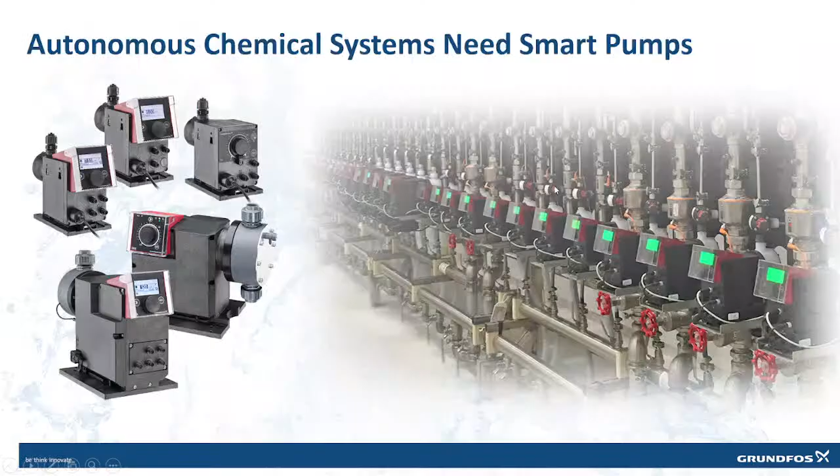So in today's market, it's all about trying to be digital and be autonomous and be able to do things remotely and not have to have the human aspect to it. So we're going to put that spin on this for the presentation, and how our pumps are accurate and how they can help you save time and money.

With chemical pumps, dosing pumps, safety is always the utmost concern. So these pumps are designed to handle tough chemicals - your sodium hypochlorite, your caustics, peracetic acid, whatever you guys are using out there in the market. By the way, what are some of the chemicals that you guys use for dosing pumps?

Sodium bisulfite? Yeah, okay. Well, with diaphragm pumps, sodium hypochlorite, they have problems with gassing. Yeah, right.

Okay, we'll talk about some of that and how we can hopefully address that for you.

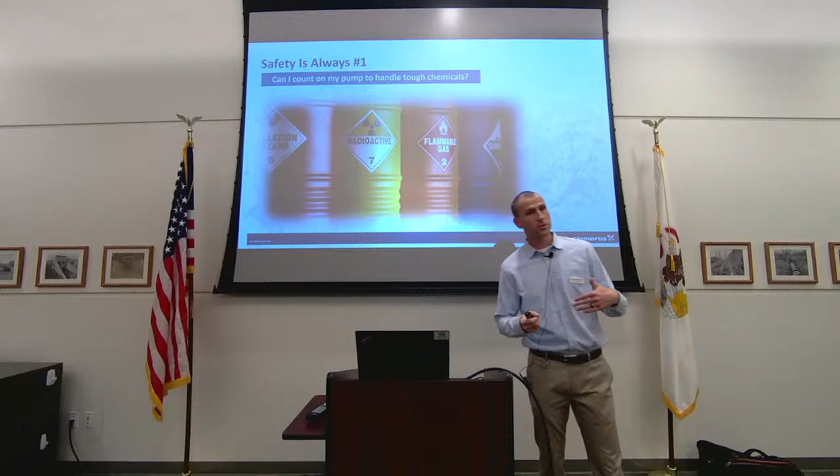So safety is obviously very concerning. Basically, when you're treating water, you're literally introducing a poison into the water, so you have to have pumps that are accurate, dose correctly, and dose on time. You don't want to overdose, because one, you're wasting money on chemical, and two, you could poison people. And the opposite is true too—you don't want to underdose, because then you can have disease and things generated in the water line. That's something that's kind of stuck with me: you're literally introducing a poison into the water line, so it's something you have to be really cognizant of when talking about chem feed pumps.

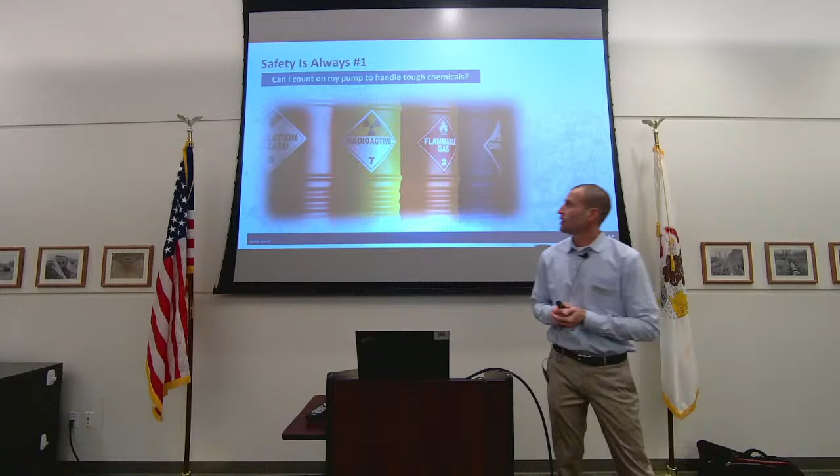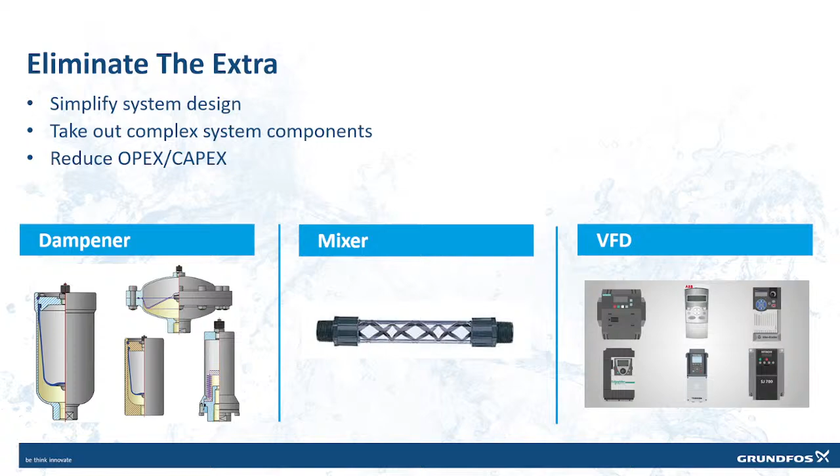So today we'll talk about some of the benefits of the Grundfos dosing lineup—how we have a simple system, how we can eliminate pulsation dampeners, how we can eliminate a VFD on your dosing pumps, and how we can eliminate an inline static mixer and a pulsation dampener.

Is everybody familiar with what an inline static mixer is? I can talk about that a bit more later as we discuss pulsations. Basically, you have a water line connected to this, and it helps distribute and mix chemical as you're dosing into the water line.

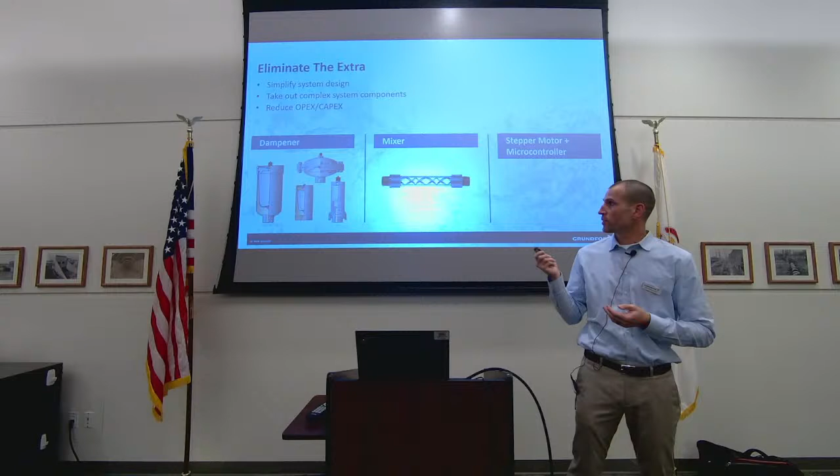And a pulsation dampener helps to dampen pulses from a chem feed pump. As it's dosing out, you can sometimes get pulses, so a pulsation dampener helps mitigate that. With our pumps we can eliminate those, which saves cost. So we'll talk about how we can make pump selection simple and how we can make integration and maintenance easy for you.

So what are the basics of a chem feed pump? You have to be able to control the pump. There are a lot of different types—you can vary the stroke length or vary the frequency of the stroke, which is the rate. So you need some method of controlling a metering pump.

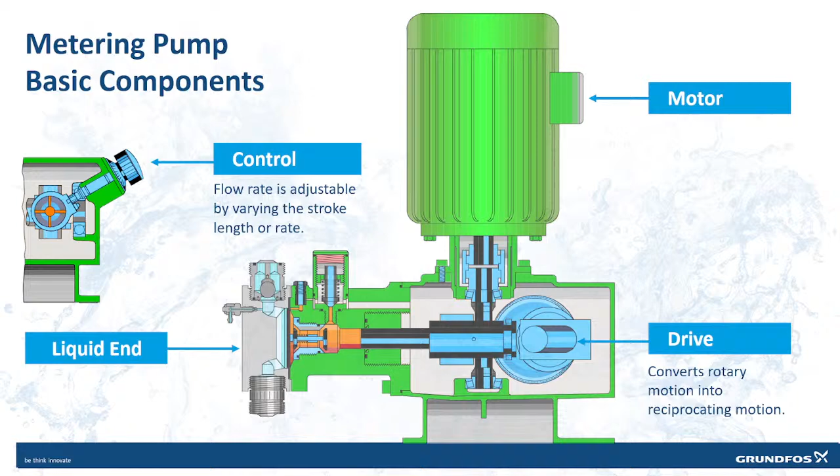Any questions? I'm going to spend a lot of time talking about diaphragm pumps. The other alternative out there in the market is a peristaltic pump. What kind of pumps are you guys using out there—are they a hose pump, a peristaltic pump, a tube pump, or diaphragm style?

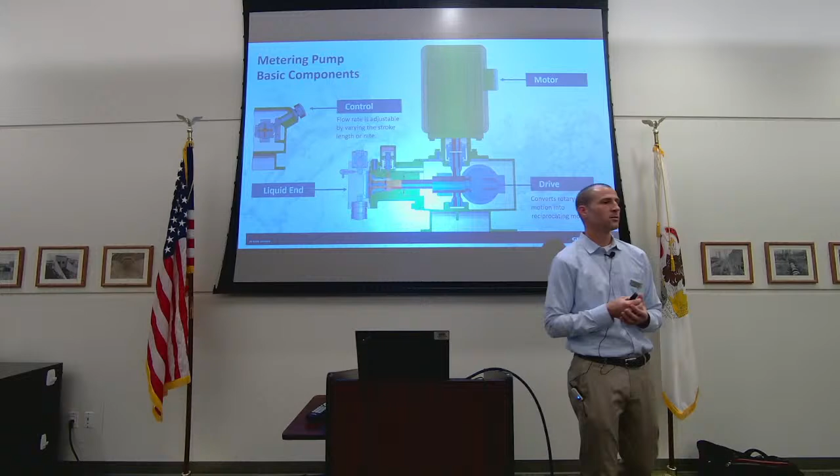Peristaltic? Yeah, okay. What, both? Just—is it cost, is it availability? The wastewater side feeds ferric chloride, we just have some LMI diaphragm pumps. And then the water treatment side uses some peristaltic. Okay, okay.

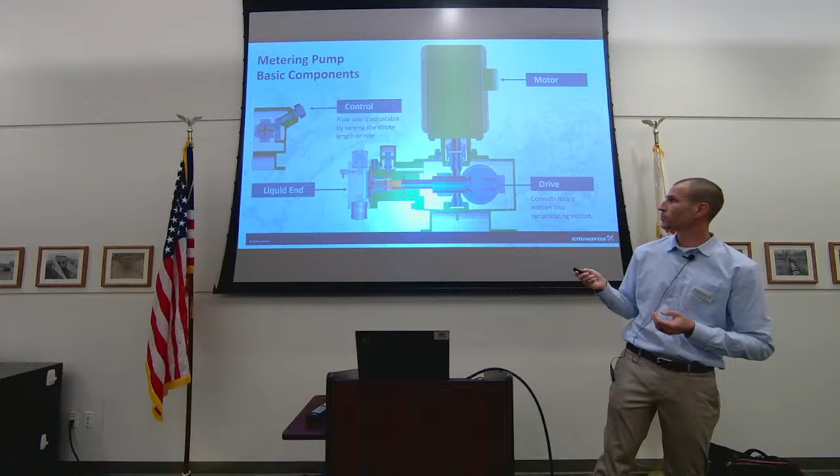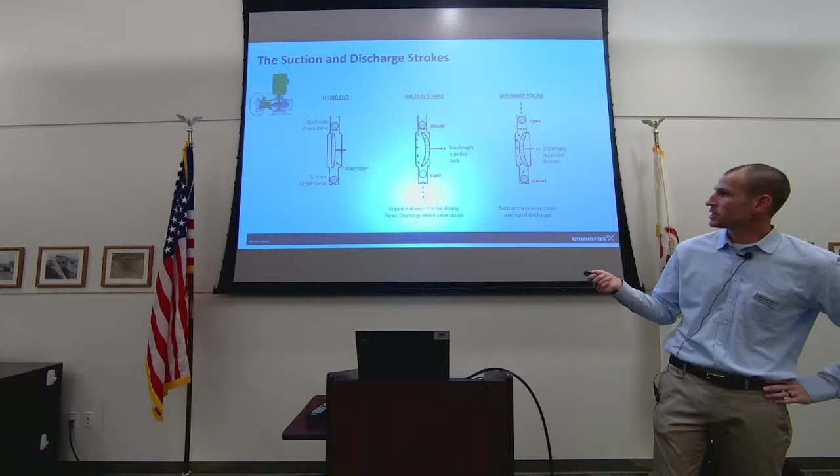So we'll talk about the control and the drive in today's presentation. On a diaphragm pump—this is kind of a schematic of a diaphragm pump—you've got the liquid end over here. The liquid end has a diaphragm, which for us is a Teflon, a PTFE diaphragm, and then you have a suction check valve and a discharge ball check valve.

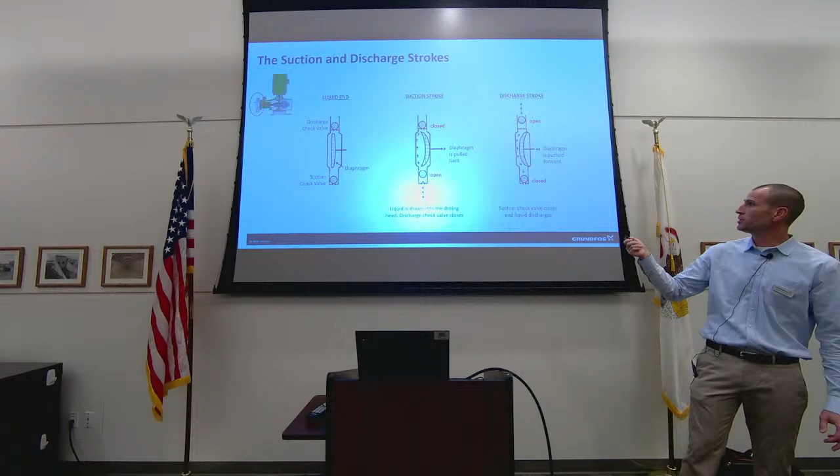On the suction stroke, the diaphragm is pulled back and the liquid or chemical is drawn in—the suction valve opens so liquid is drawn in, while the discharge ball check is kept closed. Then on the discharge stroke, the diaphragm is pushed forward, which causes the suction check to close and the discharge check to open. That's the basic way it works.

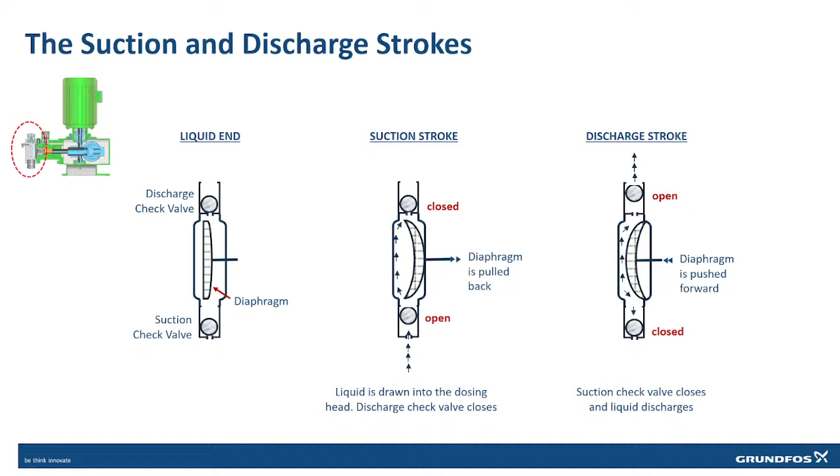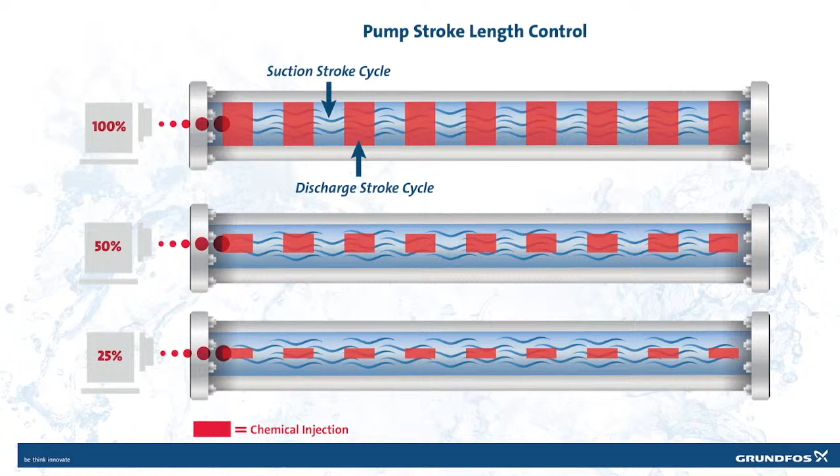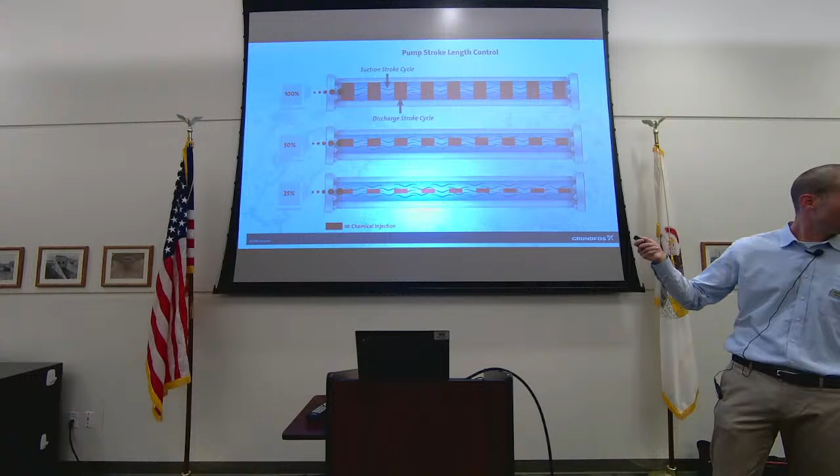So if we have a pump that is controlling the amount of chemical based on pump stroke length, if we want to dial it down to 50% of the dosing rate, you're only going to have a 50% stroke length going through here. Further on, we've got 25% stroke length. This is what a flow pattern for a pump based on stroke length looks like.

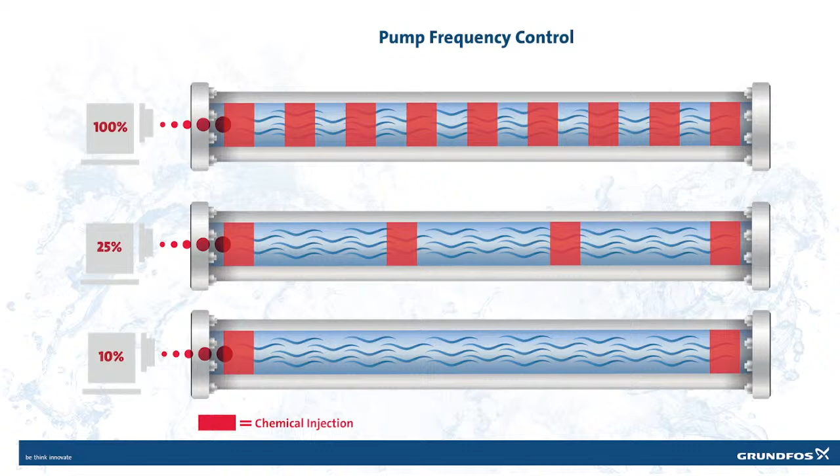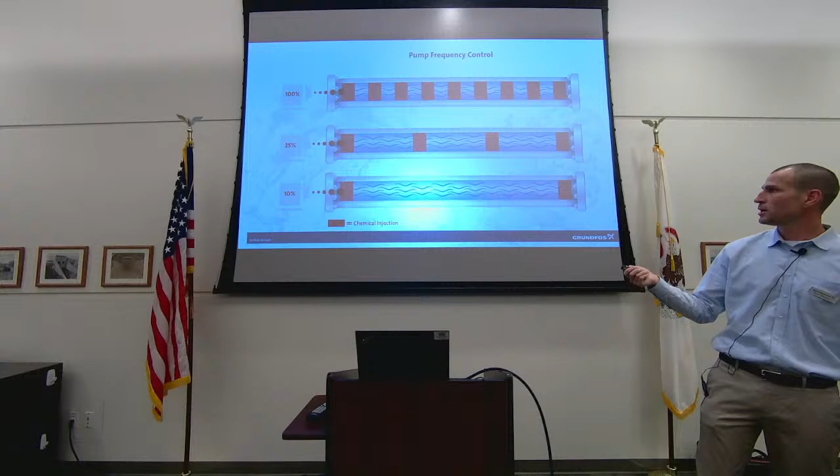Pump frequency control: this is on, off, pause, on, off, pause. This might be like a solenoid-driven style diaphragm pump, so a diaphragm pump with a solenoid motor on it. Every dosing pump at 100% speed has the same profile. This is the profile of it being reduced down to 25% speed, so it's on, off, and then there's a pause. And then at 10% speed, it's on, off, and then there's a longer pause before it comes on again. So you can see there are gaps in the chemical being injected into the line.

Now a pump with a variable frequency drive: this is 100%, and then 50%, so your pump speed has slowed down. You have your discharge stroke, which is the red, that's the chemical being dumped in there. You're having a 50% suction stroke, so that diaphragm is pulling back at that same reduced speed. If it was 1,800 RPM at full speed, now at 50% it's going back at around 900 RPM, so it's a lot slower on the suction stroke. That's how pumps work if they're done on a variable speed drive.

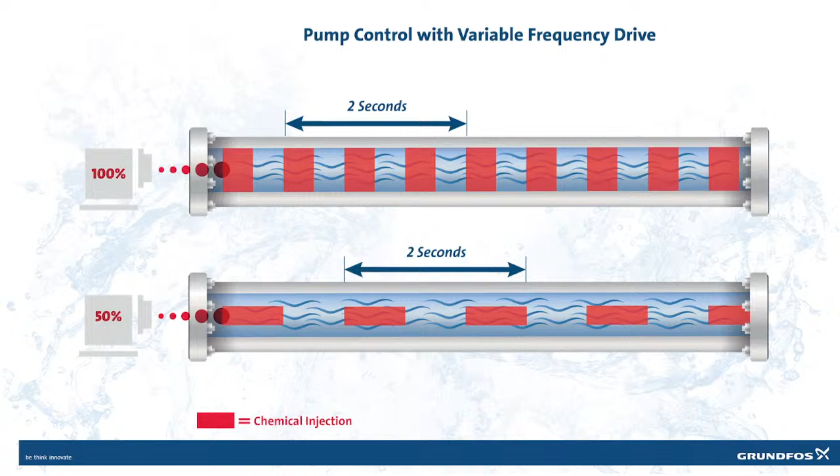Dosing pumps anyhow. So I'm going to talk to you about stepper motors and how we use stepper motors in our dosing pumps to make a difference.

Come on, I know those EPA guys. You guys got something.

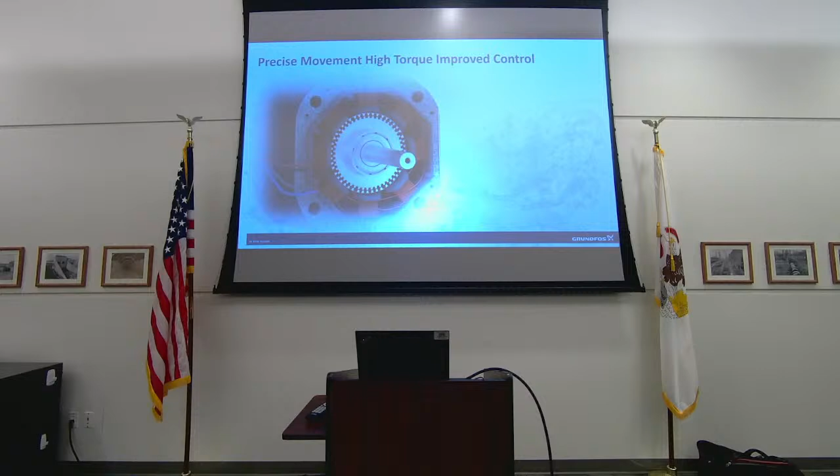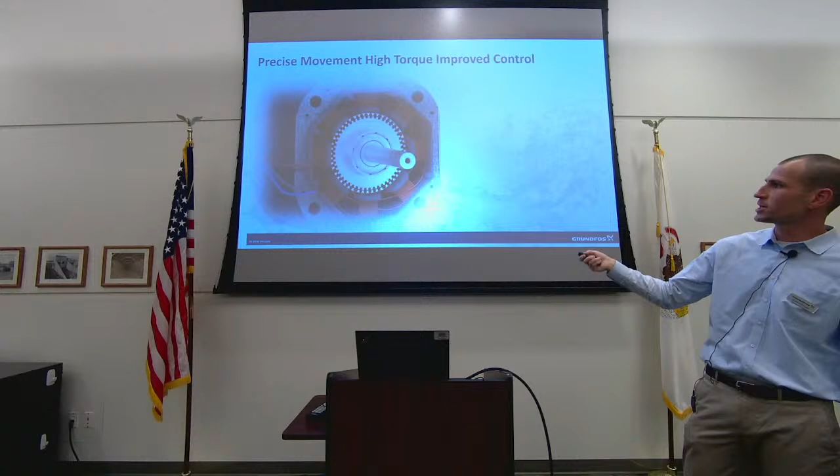You have a rotor, and then you have a number of these coils that are energized independently around the rotor.

I'm going to talk about this at a high level. You have a rotor with a bunch of teeth on a stepper motor. This is the rotor here, with a bunch of teeth, and outside those teeth you have more teeth that are connected and energized by coils. So there are a number of different zones that can be energized based on a microcontroller in our motor, or in our pump. You can vary the voltage, and it allows basically super precise movement.

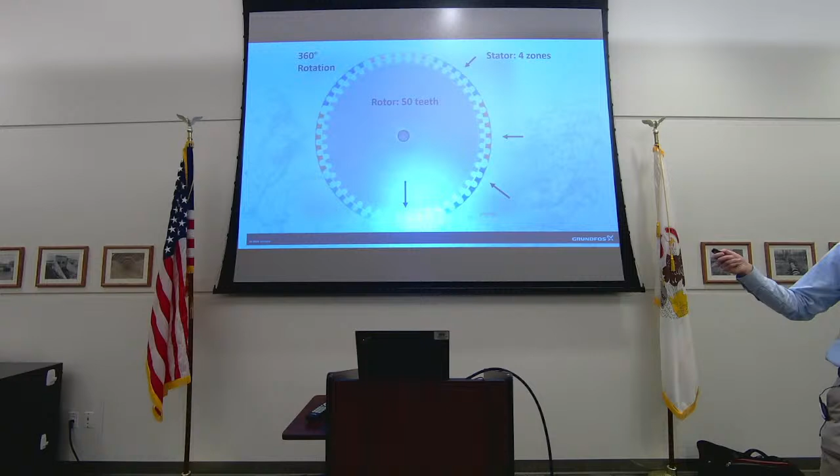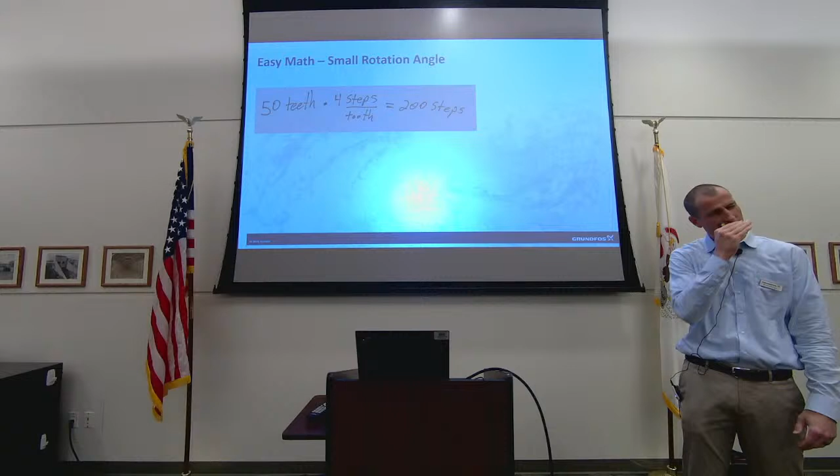Right now we have 50 teeth on this rotor, and at a high level, there are 4 steps per tooth, so we have 200 steps. That rotor can turn 200 different increments as it's making a full rotation, and we'll consider that's 1.8 degrees. But with a microcontroller, we can change that full step down to a half step, down to a quarter step, to a 16th, to 3200. That's literally why it's called a stepper motor, because it can micro-step.

Stepper motors are used on robots and in factories where you have high torque and high precision. They're used in 3D printing. I didn't bring a 3D printed model in here, but things that need super precision and high torque is when stepper motors are used. So you have the greatest control when you can slow down that pump and introduce more steps into the action.

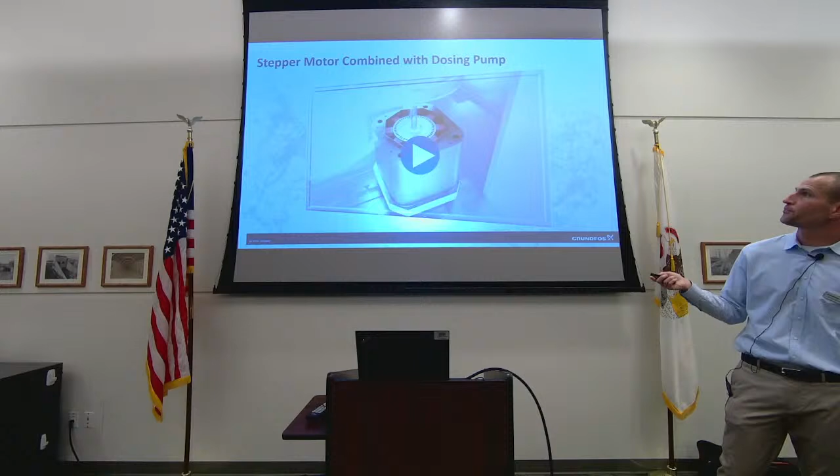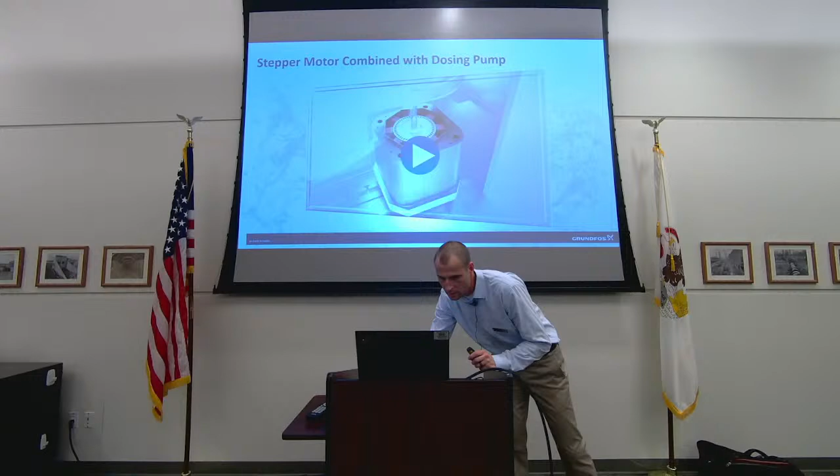So let's see if we can get this thing to roll here. Let me go back here.

That's Kurt over there. By the way, Kurt, can you introduce yourself? I think everybody here knows me. Who are you? I'm sorry for those of you that know Kurt. I don't know how he found his way here today.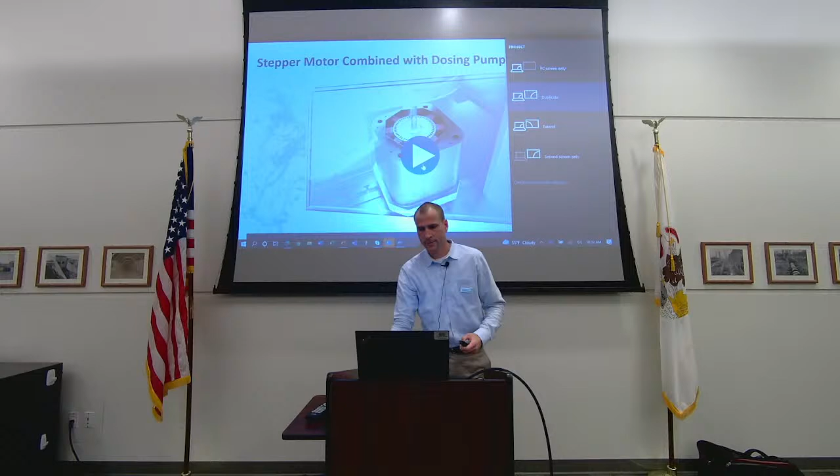All right, so this is just an animation showing, if I can make it work... there we go. So that's just the stepper motor. You have the coils around here that are energized at varying voltages to make that turn. And then here is our diaphragm and how that stepper motor pushes that diaphragm back and forth.

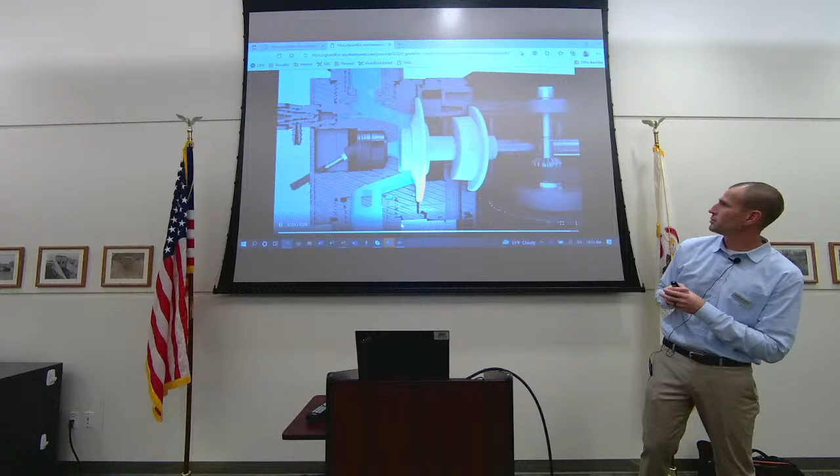And that's how that works. So anyhow, do you guys have any questions with that?

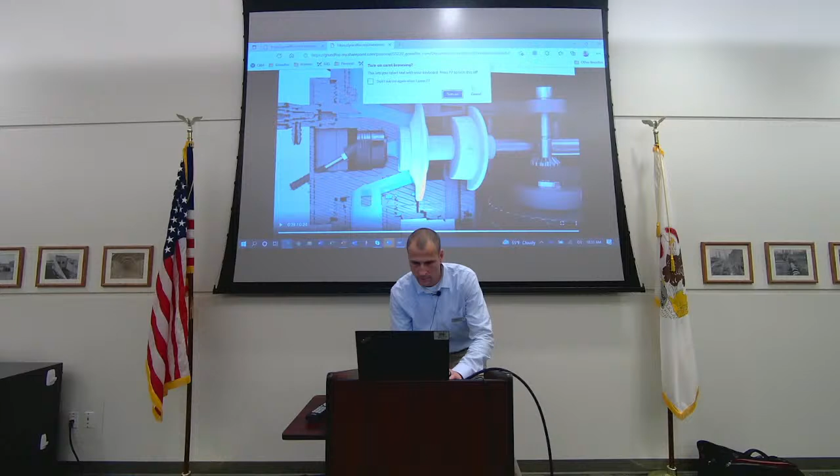Stepper motor, though, sucks back real quick. Dial it down, but then it takes its time and pushes it all the way out. Unlike a solenoid pump that's always pumping, it pushes it out nice and slow, and it sucks back. So what you're actually doing is putting more chemical into the water over a longer period of time, so you don't have the gaps that he was showing you in the other ones.

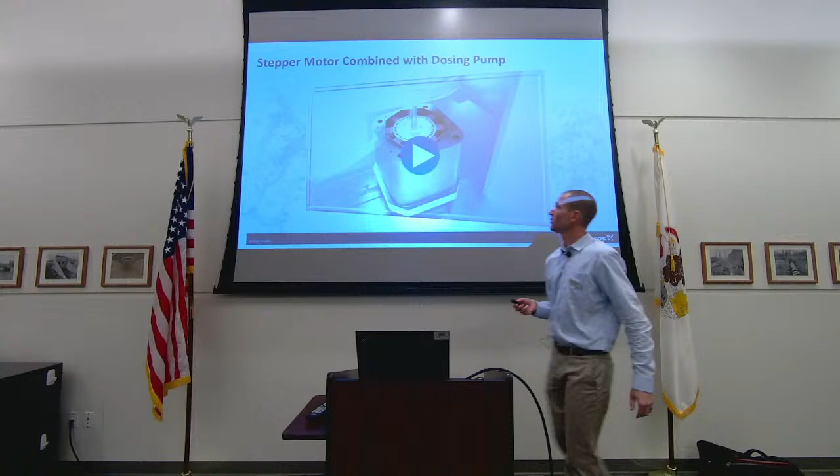All right, so from the current slide, you guys can't see that are watching online, obviously, but there is a demo unit over there that you guys can play around with during the break, see how it works, and just kind of put your hand on it a little bit. So let's talk about stepper motor and speed control with a stepper motor.

Again, it's kind of 100% speed, it's all the same across all different designs of pumps. So like Kurt was saying, on a stepper motor, if we lower that speed down to 50%, that discharge stroke is going to slowly discharge 50%, but then it has a very quick suction stroke that pulls back very quick. What that does is allow you to have very minimal gaps in your dosing, which is what eliminates the need for a static inline mixer.

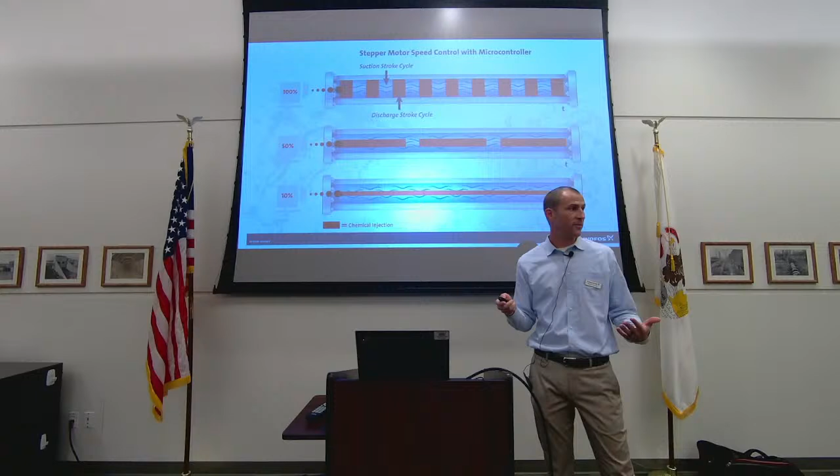And you can see, we have the greatest control at even slower speeds - we can dose very, very, very slowly, then have a short gap, and dose again. So when you're dosing very small amounts of chemical is when we have even the greatest impact.

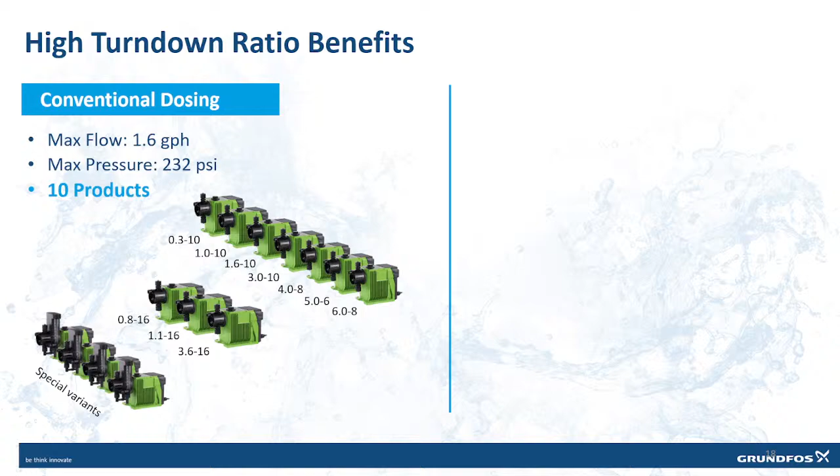So high turndown ratios - let's talk about the benefit of what Kurt was talking about. In traditional or conventional pumping, you might have a number of different products, up to 10 products, and you might need to hit different flows and different heads at different times of day, and different speeds.

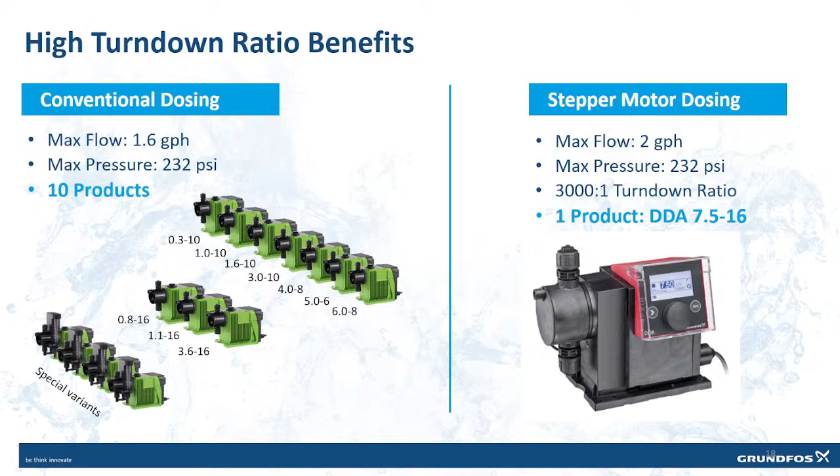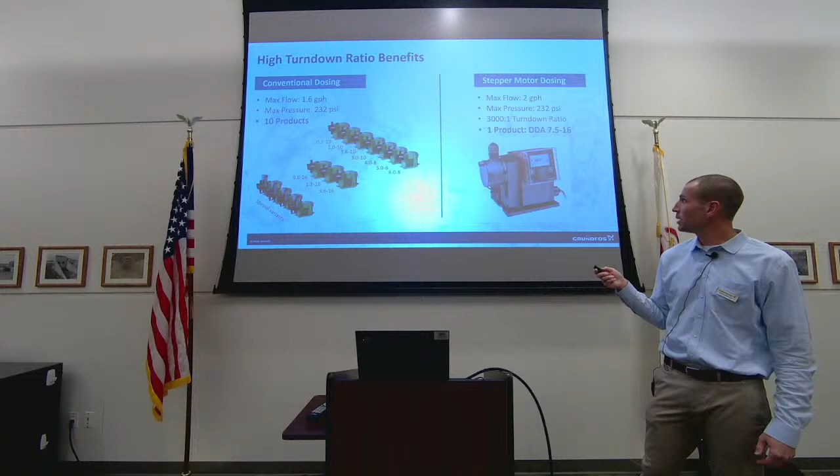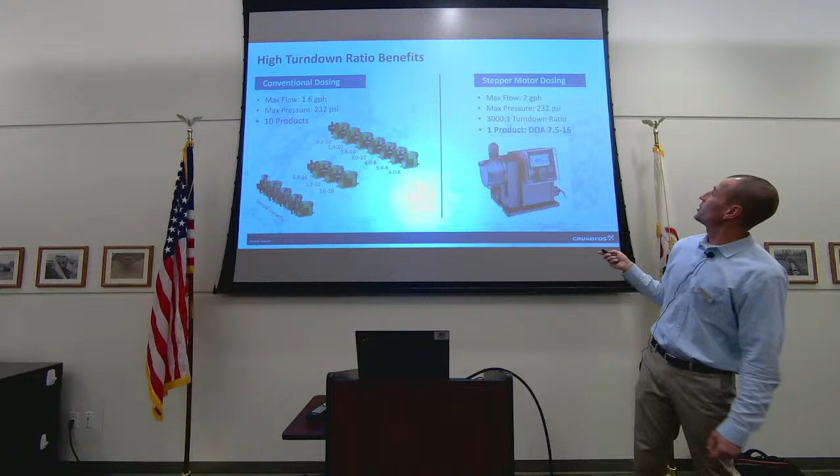So this particular demo unit is a 2 gallon per hour unit. We do have, obviously, much higher flow pumps as well, and it does up to 232 PSI. Kurt, anything you want to add on this? I'm going to keep going, but I feel like you've got some good comments you've made.

So we do have online an ability to make pump selection yourself. You can go on, if you Google Grundfos dosing pump selector, you can do that. It's basically 4 steps: you put in your flow control, or your capacity - the quantity of chemical you want to dose, your discharge pressure, how you want to control it, analog or digital controls, remote start and stop, graphical display, and then the type of chemical.

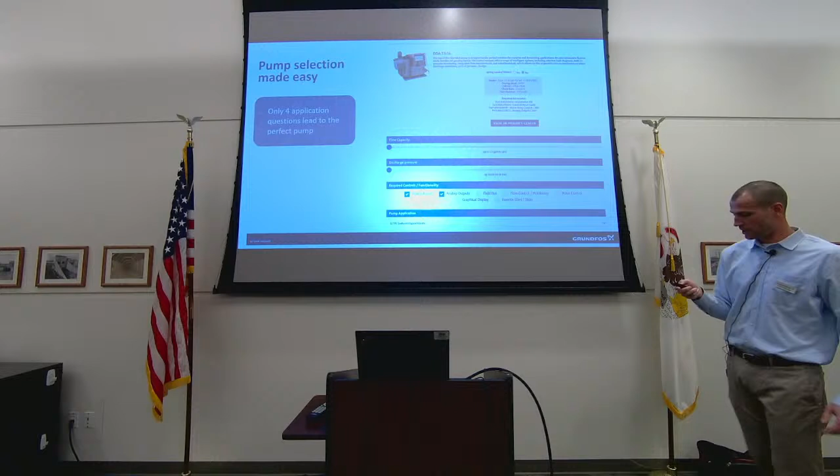So in this instance, we have a number of preloaded chemicals on there as well. Sodium hypochlorite is pretty common, so we've got that shown there.

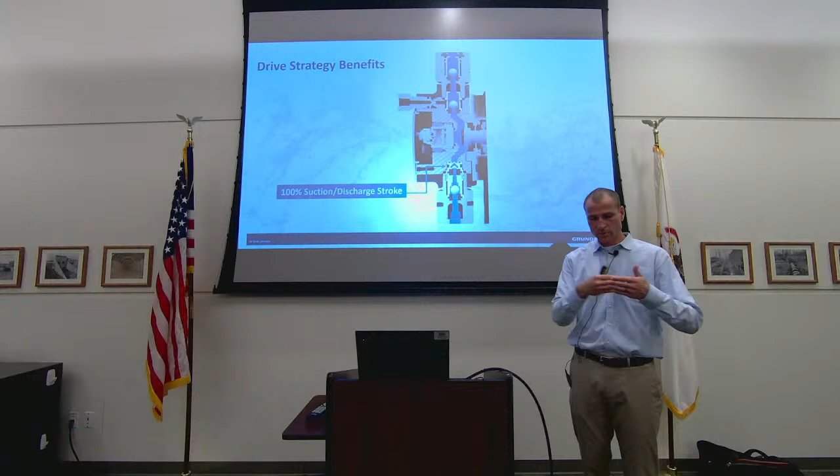So let's talk about drive strategy benefits to the stepper motor design. We've got 100% suction and discharge stroke, so we're not varying the stroke length. We've always got that cylinder, that wet end that's always going back - the diaphragm is always pushing back and forth - so we are always able to calculate the exact amount of chemical that's being dosed.

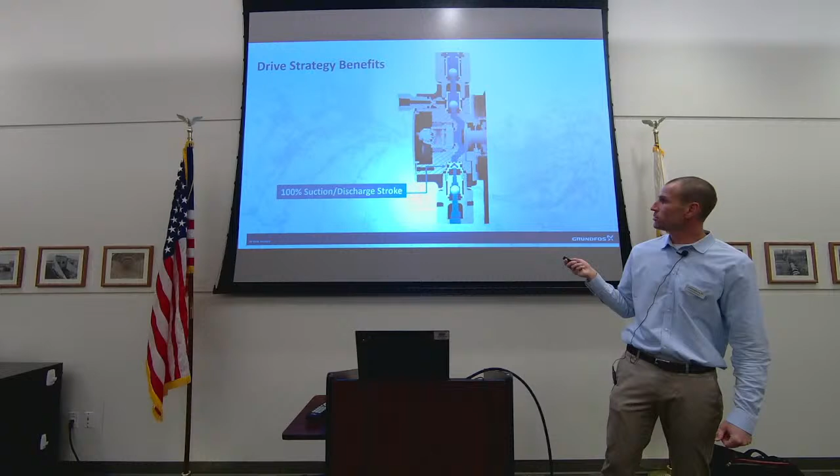We have on this air bubble detection. So we talked about peracetic and sodium hypochlorites that off gas - this has air bubble detection, and I'll demonstrate that in a little bit.

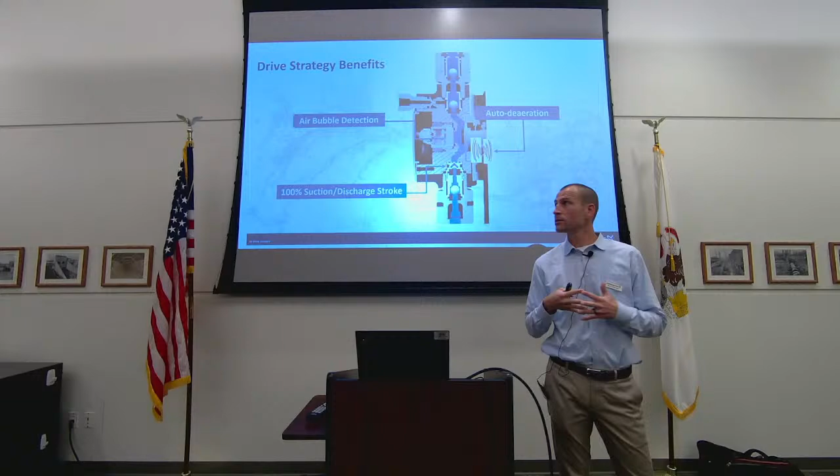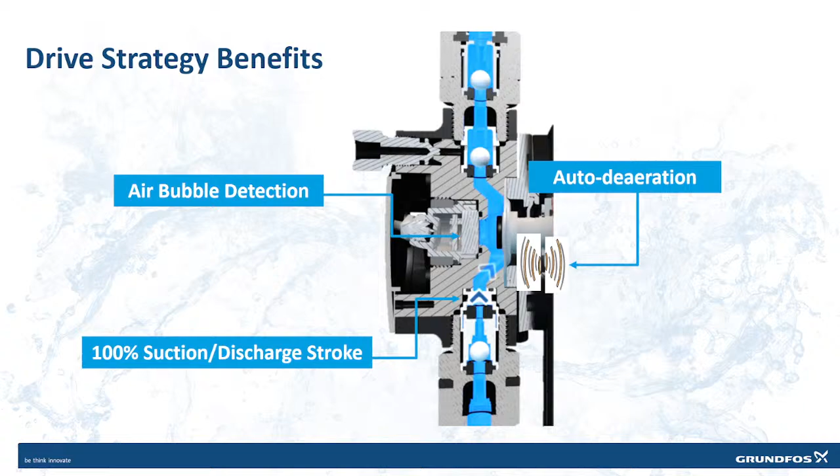We have a feature called auto-deaeration. A lot of times municipalities are not producing water maybe at night, so these pumps are sitting on top of sodium hypochlorite and it off gases. These pumps auto-deaerate every 20 minutes, so it gets those air bubbles out through the wet end. So when the pump is called to turn on, there's no air in the line, no air in the wet end.

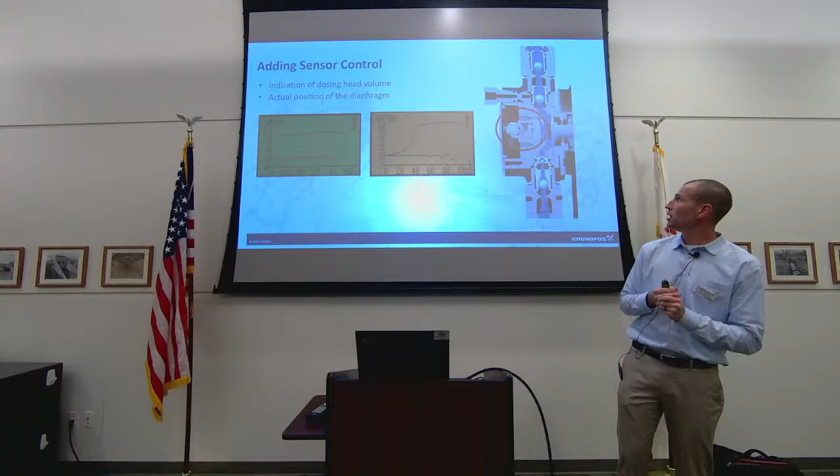So let's talk about adding a sensor control. We have a sensor on these pumps that's basically a pressure sensor, an indication of the dosing head volume. We can determine when there's air in the line, when the pressure has changed in the line we're dosing into, so we can speed up the pump, slow down the pump, always to get that accuracy and that set point you always want to dose chemical to. So we can prevent overdosing and underdosing.

So how does the pump detect problems in the system? Normally in a system you would have a pressure indicator, some sort of flow meter into the pump.

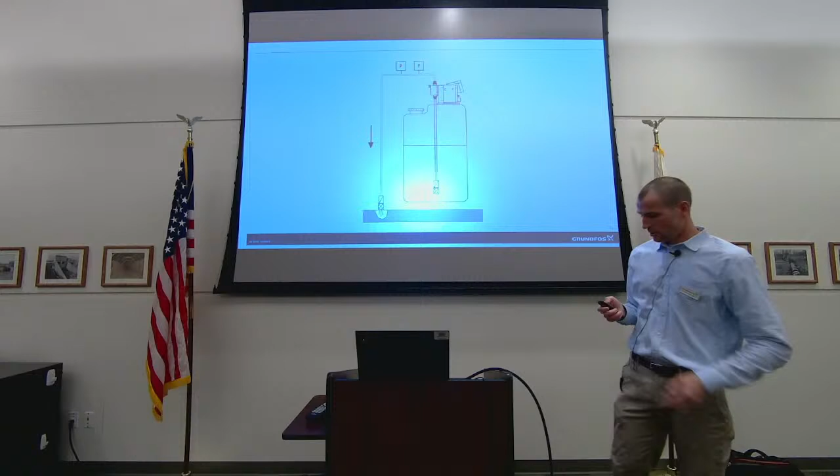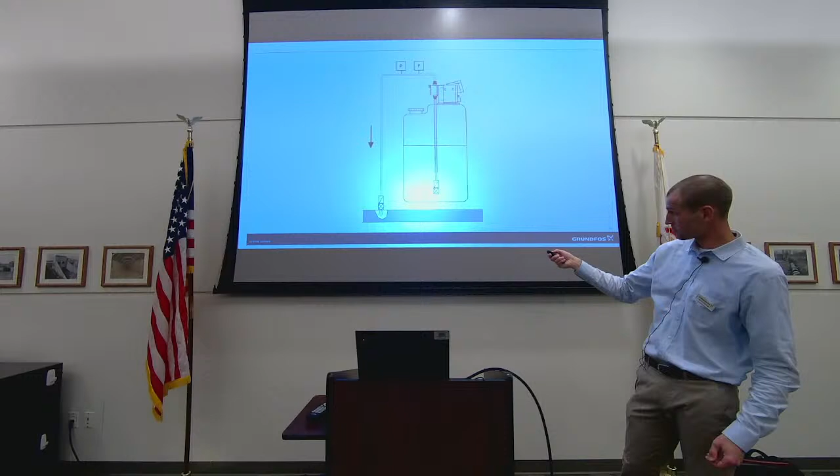Let's talk about how we can maybe eliminate that. So if you caught that, this is a dosing pump up here. Here would be your pressure gauge. Here would be your flow meter. Here would be your injection quill, or your injection point into the line. And here's your foot valve that's pulling out of the tank.

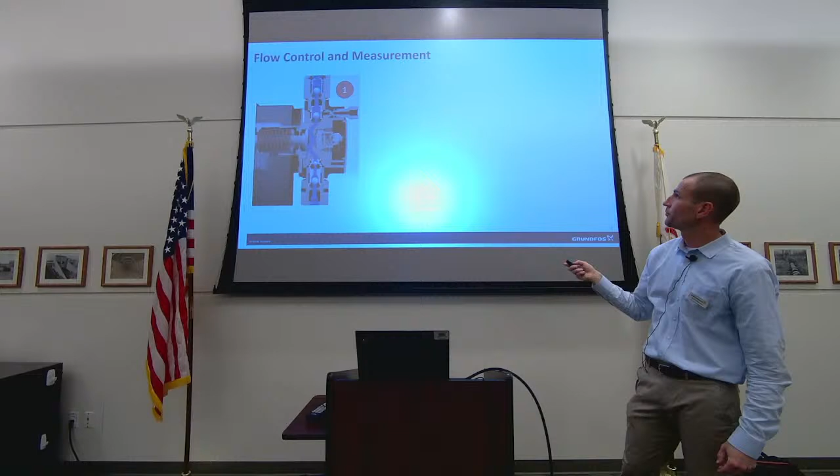So let's talk about how we can maybe eliminate a couple devices that you normally would have, like flow control and measurement here.

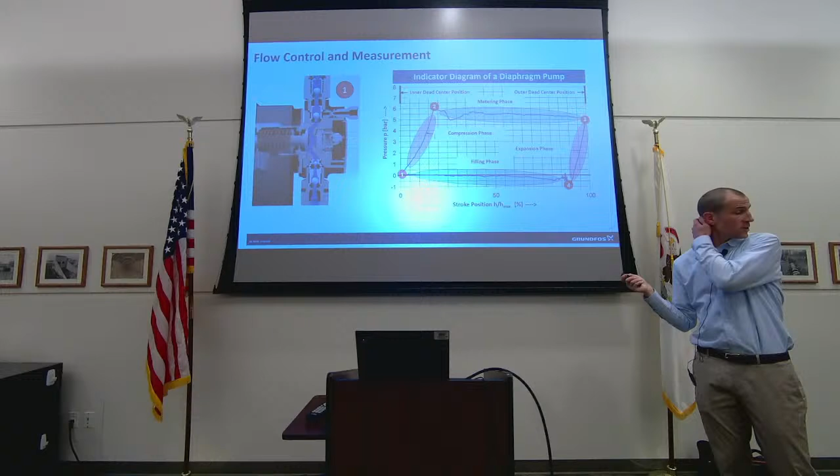So this is what's called a performance chart. Normally on a centrifugal pump, you have what's called a pump curve. On a chemical feed pump, you have what's called a performance chart. This is just showing the different phases of how that chemical is brought into the wet end, compressed, metered, and pushed out. It's almost like, if you think back to shop class, like a 4-stroke engine or whatever — this is kind of what we're talking about here.

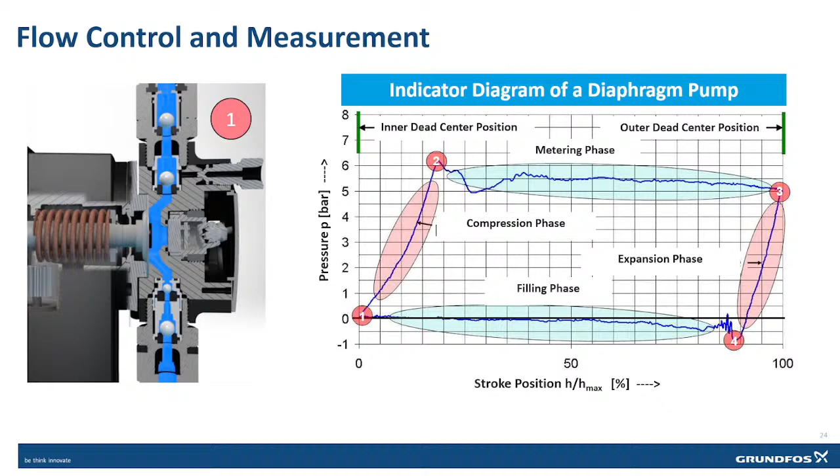So we've got pressure on the y-axis, and we've got stroke position on the x-axis. Your first part is your compression phase. As that liquid is drawn in, that diaphragm is slowly starting to push, so it's compressing that liquid.

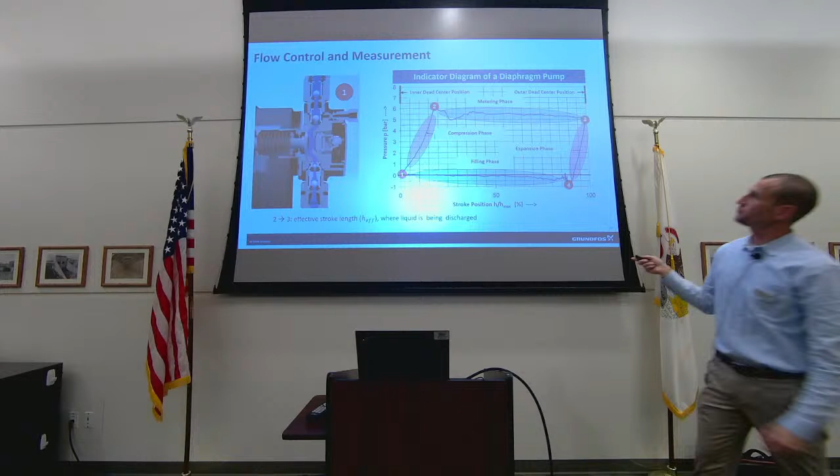Then you have the metering phase. That diaphragm pushes that liquid out, and we're metering the liquid as it goes out, and then that diaphragm pulls back. We have an expansion phase — the diaphragm is now moving back — and then we have the filling phase. Think of that diaphragm pushing, pushing, pushing, and then at step 3, it starts to draw back, so it expands, that chemical expands, and then you've got the filling phase, bringing that chemical back into the wet end. That's just a little bit of tidbits there.

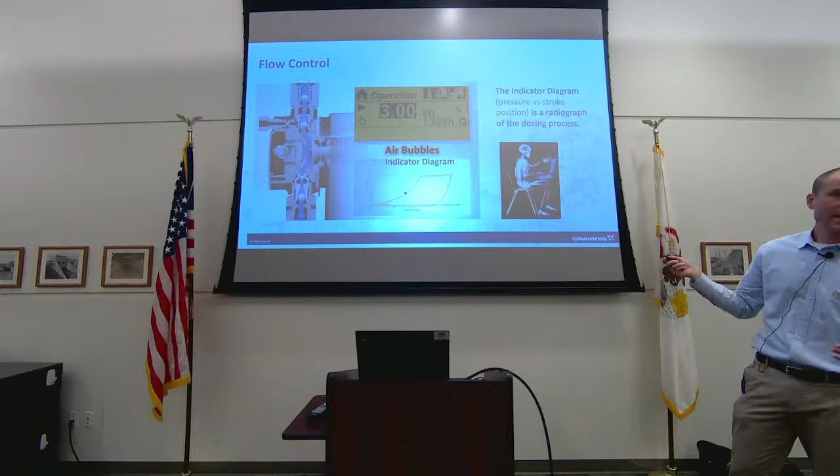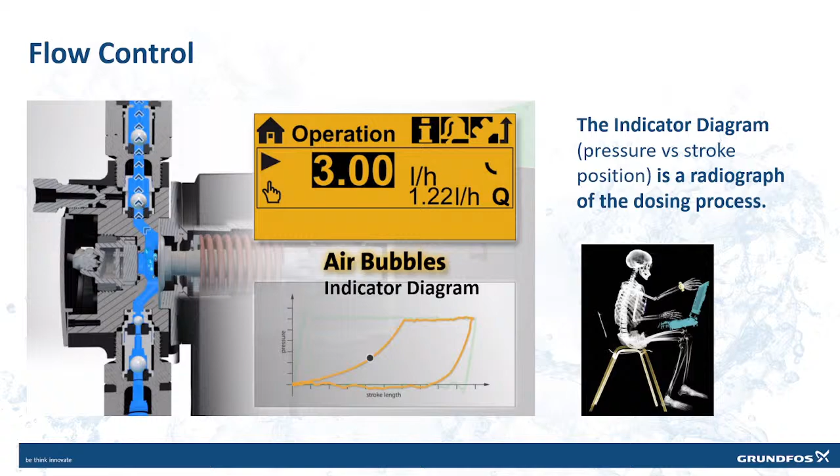So for flow control, think of it like we're able to diagnose air bubbles, we're able to diagnose leak detection with a pressure sensor that is on these pumps. We'll give a demo here of when it goes into that mode, so you can see what actually happens. It's hard to tell on the presentation, but when you see it in person you can tell exactly what's happening.

When we have air bubbles, normal operation of a pump would look more like this blue line — that'd be normal operation of the pump. If we had air bubbles in the line, that compression stroke is going to keep going because air does compress. If there's air in the wet end, it's going to notice. We have a microcontroller on the pump, and the controls will notice via that pressure sensor that there's air in the line. It notices that and charts that, and then at that point it knows it needs to speed up to try to push those air bubbles out. So it's got that auto-detection feature.

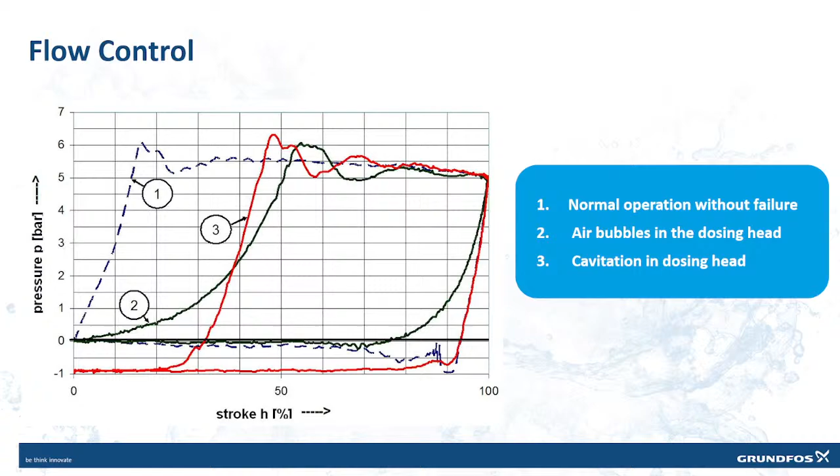Kind of the same thing with cavitation. So if you have a plugged suction line — say at number 3 here — it can detect that and deliver an alarm and a warning to you as well. All of that can be sent remotely, so you know that you need to come out and check things. Either way, if it's on the suction and it notices it doesn't have any liquid, it'll speed up. If it notices that it's still not getting that point, it will send out an alarm — either on high pressure or if the pump is not pumping properly.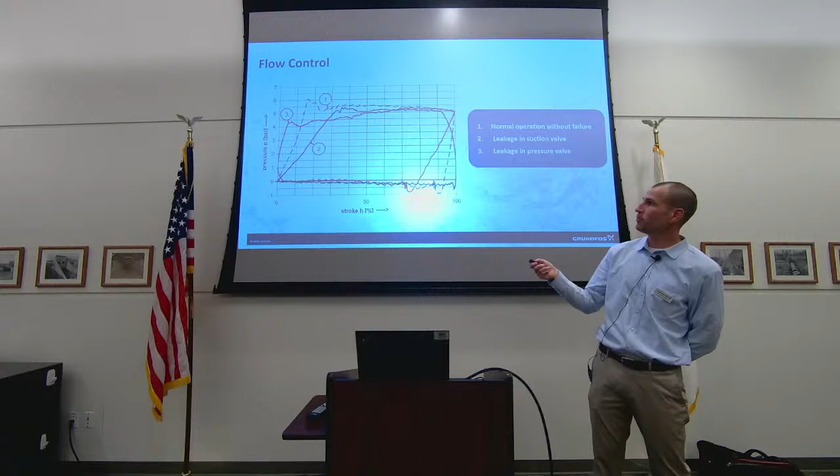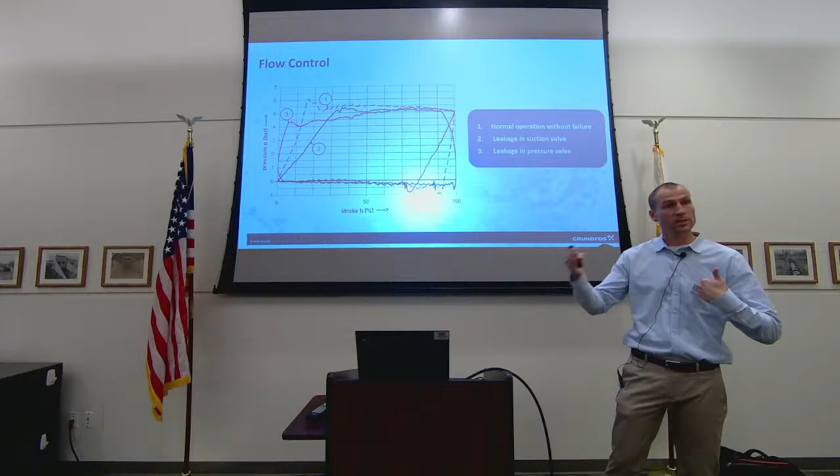So again, this is just talking more about flow control and performance charts, and how this pump actually has brains in it and can determine what's happening in the system. It basically adjusts its speed based on what we're seeing is happening. The pumps also have a red light, green light, yellow light system. Red is basically an alarm, yellow would be like a warning, and green would mean everything's good, everything's working.

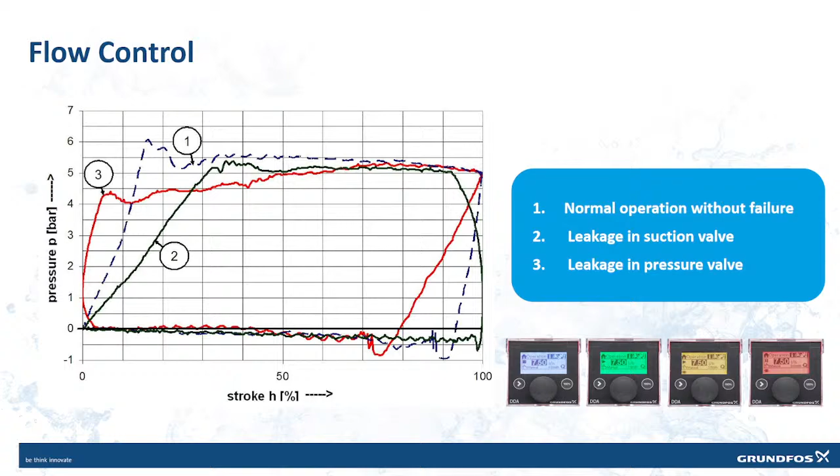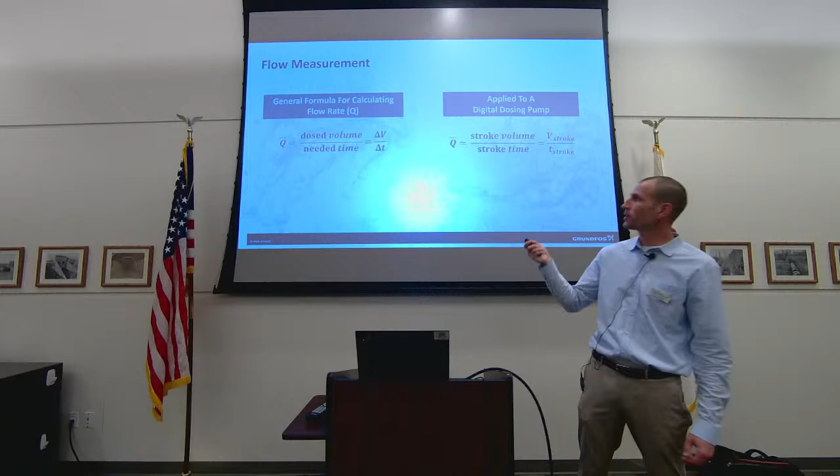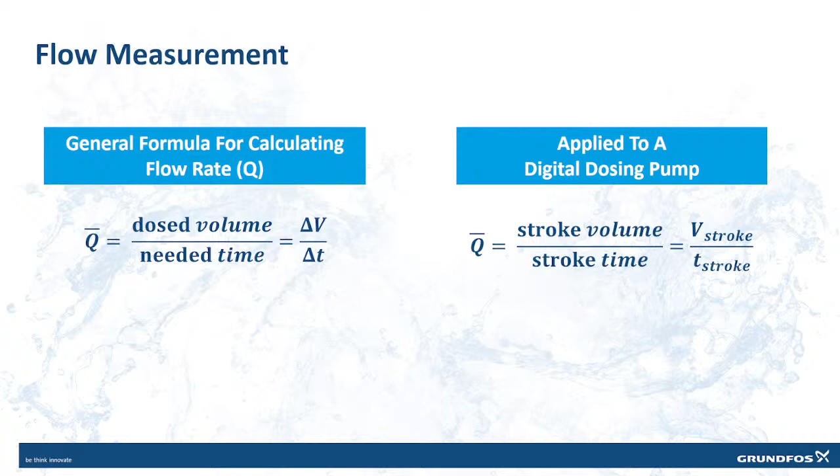So for flow measurement, just a few formulas for you. The general formula for calculating flow rate is the change in volume over the change in time, delta V over delta T. Applied to a dosing pump, stroke volume is divided by stroke time — your amount of volume in your stroke length divided by time. That's basically how you determine flow.

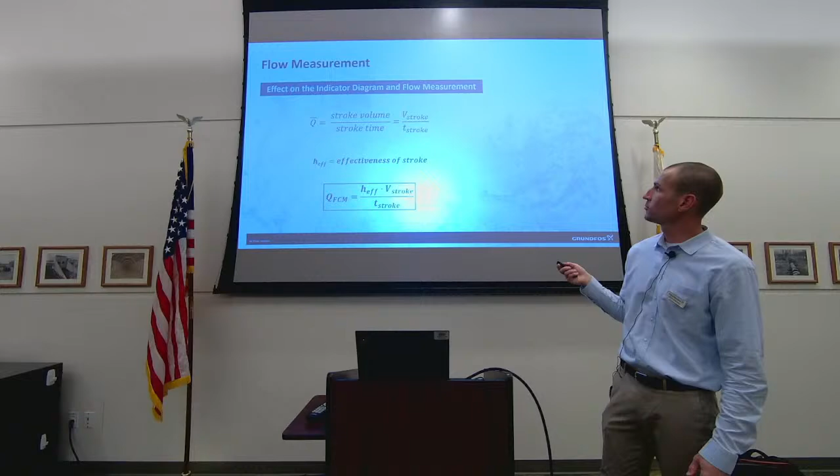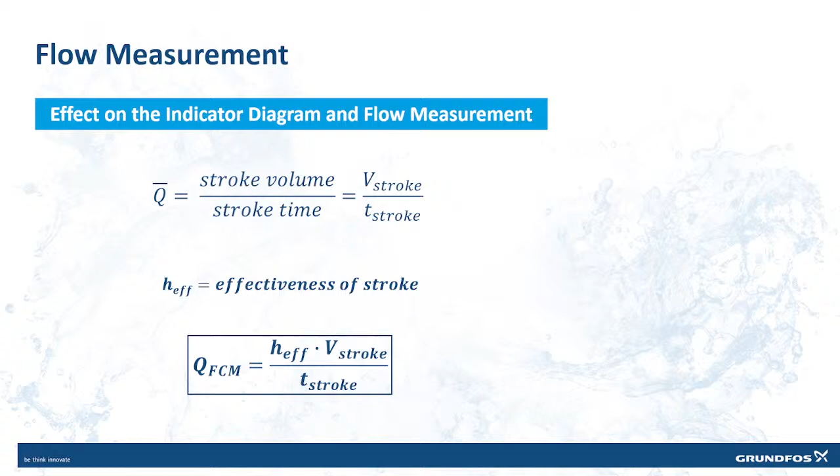We're just going to talk about the effective stroke length. Say for instance this would deliver 5.9 liters per hour - we're talking metric here, I know we're in the US, but this is just in liters. If we had cavitation going on, the indicator would then determine, oh, I'm only pumping 3.78 liters per hour. Something's wrong, I need to do something to compensate for that.

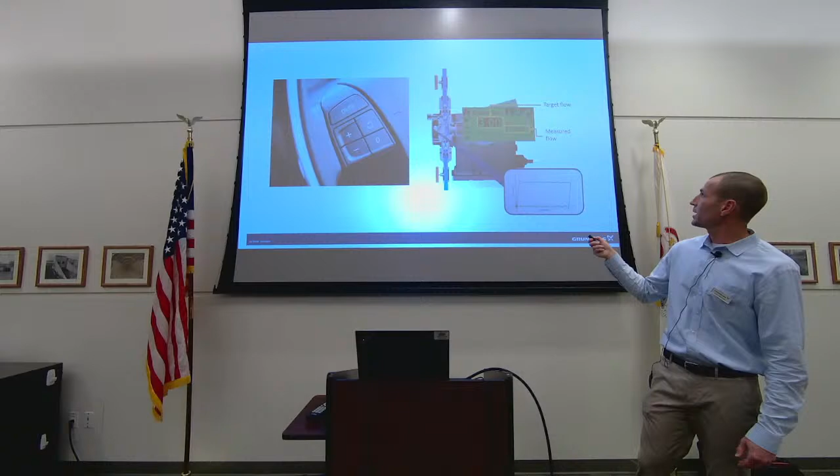So with our AutoFlowAdapt, it's kind of like cruise control for your pump. Again, we've got that pressure sensor I'll talk about. We have our target flow, say 3 liters per hour, and our measured flow, 2.99 liters per hour. We're always trying to hit the target, and we always display what our measured flow is. Here we're pretty close, but what the pump is going to do is try to get up to that 3 liters per hour, so it's going to speed up.

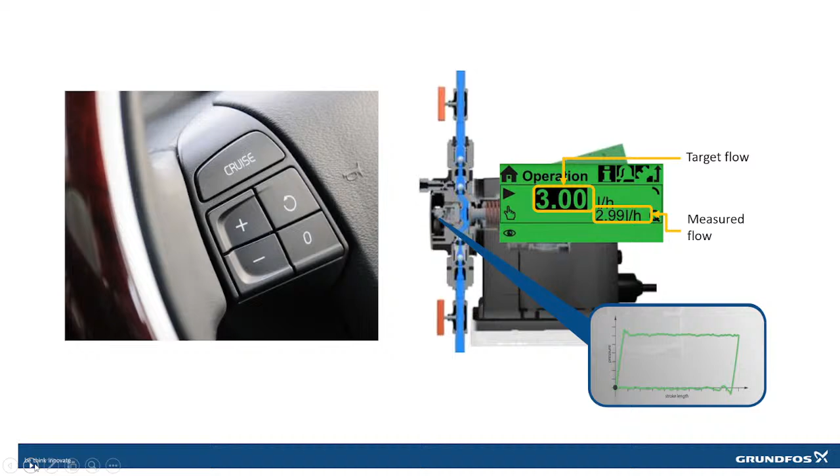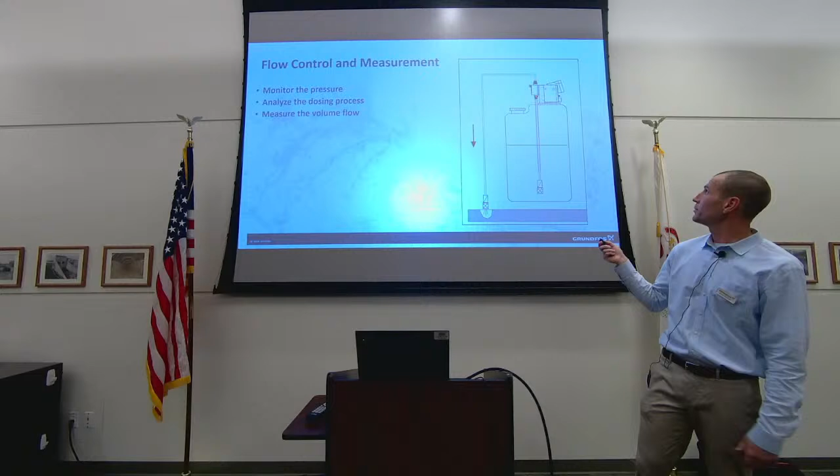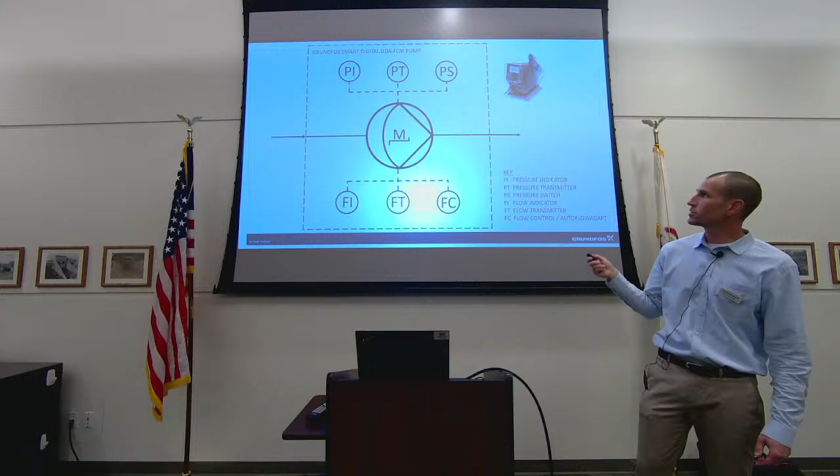So flow control and measurement, let's talk about a few things here. We eliminate the pressure sensor because we have that built into our pump. We eliminate the flow measurement because we have that built into our pump too. So basically the Grundfos DDA is kind of a flow indicator, transmitter, flow control, pressure indicator, pressure transmitter, all in one. We've thrown a schematic here showing that's all included, so it helps you save a little bit of money there.

So again, it's all about automation with a dosing pump.

I'm going to, do we need to? Okay. I can be pretty quick here. I'll show you a few of the benefits of this dosing pump. Let me see if I can bring this over here real quick. Yeah, I think that might be good. I thought it might be good to bring it over to that table for a second.

Let me get this going for a second. I've had it off for a little bit, so I know there is some air in the line. Can you see that with the camera doing it this way? I need to get some water through it, as long as Brett gets the water going.

As I just started up, it has air in the line, and you're seeing it's noticing there's air because it's sat in my office for the last couple weeks and it's been on an airplane. So it's speeding up, trying to match that set point, and trying to push that air through. Then you'll see it slow down as it matches the set point. So we have 5.54 gallons per hour.